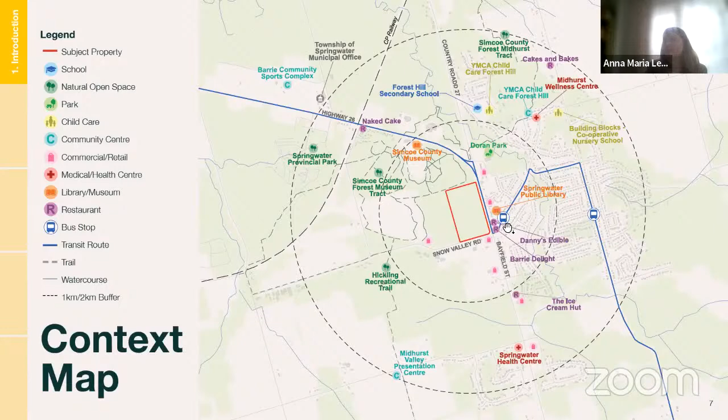I think the last part of the introduction is our timeline so far. The project timeline has been divided into 3 key phases. Phase 1, beginning last year and running till about the beginning of summer, was the engagement and research portion, heavily led by 880 Cities with their pop-up events and focus groups, gathering feedback from the community and key stakeholders mentioned earlier.

The second process was phase 2, the design process, from end of summer to late fall last year. That was taking all those ideas and synthesizing them. We carried out a charrette exercise and came out with a preliminary design strategy for the site, which was developing our draft master plan.

Since that point, we've moved on to phase 3, the refinements - working with the steering committee and town staff to take that initial master plan and refine it, work through it, see what works and what doesn't. Since then we've explored an additional 4 options, which Vivian will be discussing later on. So we are here hoping to get your feedback today on the 4 or 5 options, and the ultimate preferred option will be explored in a final summarized report to council.

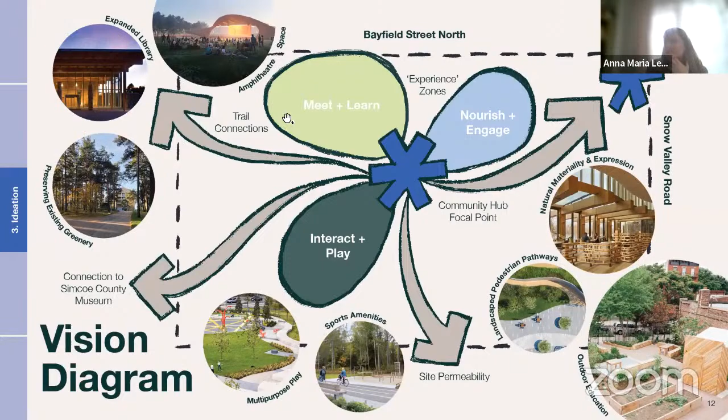As Anna mentioned, from now on we are going to delve into the design principles that led us to these 3 zones of experiences and 3 main buildings with different programming, following what we heard from community members and key stakeholders in this process.

In the 5 options we are going to see from now, there are design principles that led us to design decisions, building location, and site circulation. Listening to the community, talking about connection with nature, and connection between community members that would foster a sense of community and belonging.

There was also a very explicit need and desire to keep the ambience and environment as is, in terms of building from the pathways that already exist there and the trails that connect through and to the site. Based on that, we had the idea of one of the core principles being enhanced connectivity - there is a connection between the site and surroundings already there.

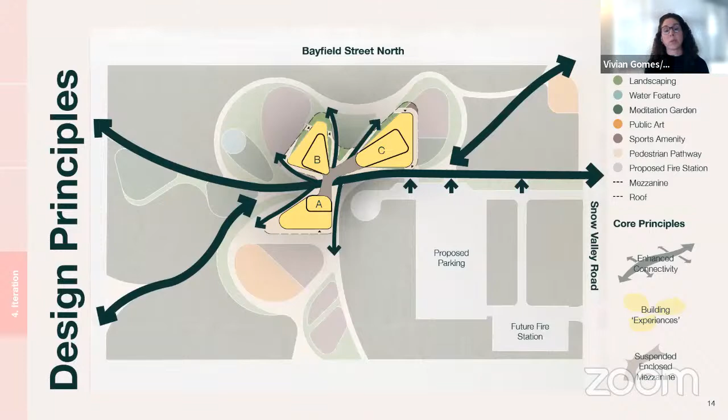But at the same time having uses and programming separated and integrated. So as you see, we have building experiences connected at grade, uninterruptedly, and then connected by a suspended enclosed mezzanine that would bring this sense of unity between the 3 buildings.

So building A, we have 5 options for building A. This is the interact and play experience. As you can see, there is an outdoor programming that's flexible and can be tailored according to the community needs in the next phases of the project.

But we envision bringing from community feedback an outdoor gym, tennis courts, pickleballs. We would also have a multi-use and intergenerational area. In all of these zones, we would have a mix between hard and soft landscaping surrounding the buildings and integrating these zones to the natural forested area that we already have there.

The transitional spaces between the indoors and outdoors, we would have those terraces that can be used as a cafe, as a bar patio, and also a covered area somewhere that people can look and experience the outdoors, but with the feeling of enclosure and protection from the weather.

Internally, we included the fitness area that would be 500 square meters dedicated to a fitness center for the use of the community. And then there is a space for a lounge area in the mezzanine. A lounge area can be seen as spaces to sit and gather or read a book. It's basically a community living room.

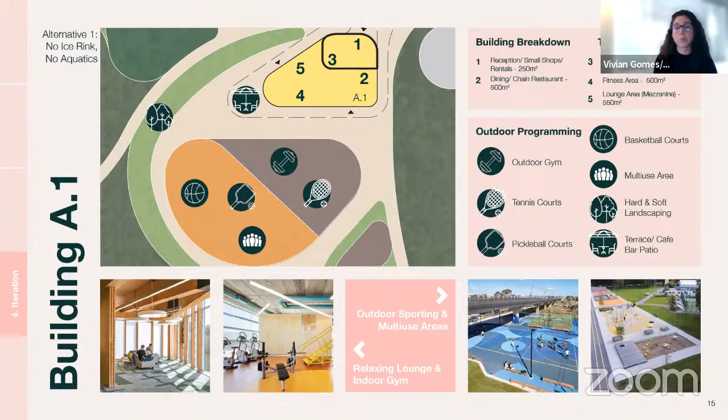Just to highlight this alternative of building A, this option does not consider either an ice rink or an aquatic center. On the bottom, you can see precedents and examples of what it can look like, but again, as this is a master plan and just the framework where the project will evolve, these can change.

So the second option, an alternative for building A, remember this is interact and play experience. This alternative considers including a single arena, a single pad arena, estimated at 1,760 square meters. We will also include washrooms, showers, and lockers facilities. And as in the first option, space for rentals, small shops, dining, and also the lounge area in the mezzanine that can be a space for parents to gather while the kids are playing hockey.

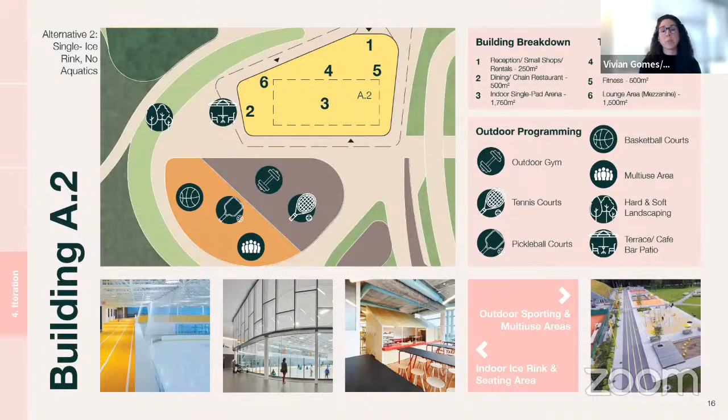And the idea is that this is an integrated space, so transparency and visibility from different areas of the building is encouraged.

So the third alternative for building A includes a double pad arena, that would take 3,300 square meters. And as we increase the programming and use of the building, facilities such as washrooms, dining, lounge area, and reception would increase as well to be aligned with the demand and new capacity of the building.

So we have here 10,750 square meters. This is the gross construction area, which will discount around 5% of space dedicated for circulation and some other structural elements of the buildings. Again, the idea is to have this transitional space between the building and the outdoors. As you see the roof line dashed, you will have some sort of terrace between the building and the outdoor amenity areas.

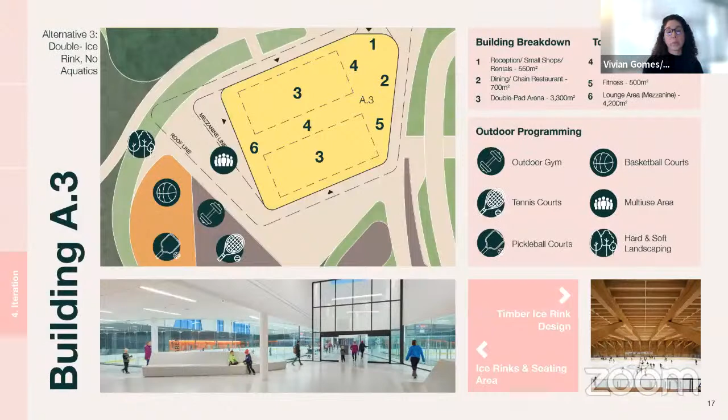So this is the fourth alternative that, different from the others, includes an aquatic center. This alternative is a single pad arena that would take around 2,000 square meters, and an aquatic center that integrates around 1,300 square meters.

So we have an increment of total GCA here, now 11,650 square meters. As I mentioned before, as the building area increases, some of the facilities are going to increase as well to respond to the new capacity of the building. As you may notice, the outdoor programming we try to keep the same between all these building A alternatives.

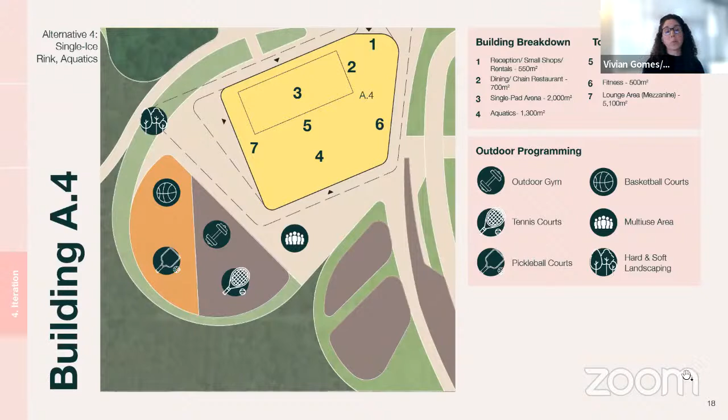The element that's changing, as you see, is the additional arena or arena-aquatics combination, as you just saw in the other three options. So the final option for building A would be a double pad arena and an aquatic center. We get to a total GCA of 12,700 square meters to accommodate the double pad arena, the aquatic center, and the increased facilities that have to follow the increase of building capacity.

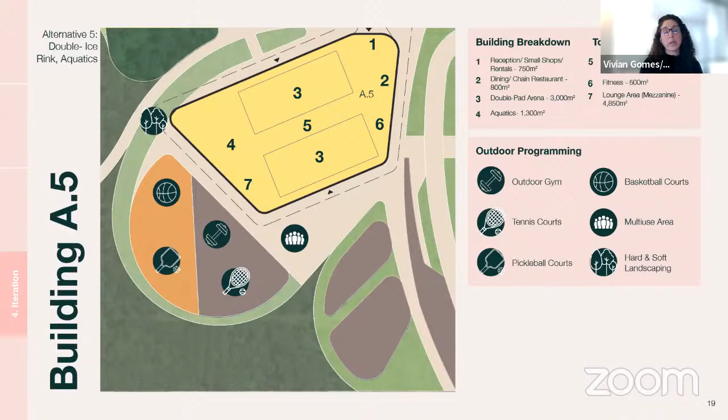And we'll move to building B now. Building B is that space, as we mentioned, like the meet and learn.

We also believe that having a play element there, the natural playground - we heard a lot of community members expressing the needs of more natural spaces to play - a water feature that can be a splash pad or a pond, even with a flexible use that can be adapted to winter time.

That's because we believe that play is also a tool to learn, and arts and culture, as is stated on the key themes, like culturally diverse and celebratory spaces. We envision this outdoor amphitheater that can be versatile and adapted to year-round activities, again having communication between spaces and nature in a very permeable and connected way.

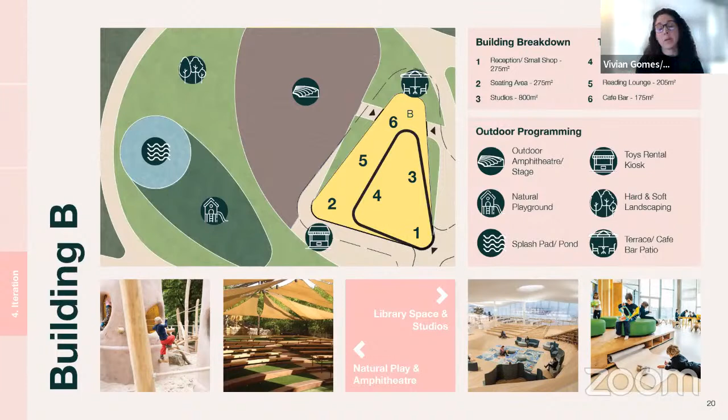So some of the precedents at the bottom, you can see the multifunctionality, adaptability, and also the creative use of spaces that should be shaped by the community.

And building C, as I mentioned, this is the Nourish and Engage. So we included the community garden and the eco hub, where education about the environment or about nurturing the earth and this connection with the natural environment would happen there.

There was also the need to have these community learning and multi-purpose spaces where studios or classes can be fostered there, as well as intergenerational activities between seniors and youth to have one or another teaching each other their skills.

Offices - we included 930 square meters for office and a daycare with washrooms that would serve these facilities as well. We would have some of the offices on the ground level and some of them on the mezzanine. This is all a note to these elements and the way that we are organizing, laying out the building interiors.

This is just to help you visualize the potential for building spatial organization, but it's not fixed. This is again a master plan level exercise, to help you envision how we can use these spaces, but not fixed yet.

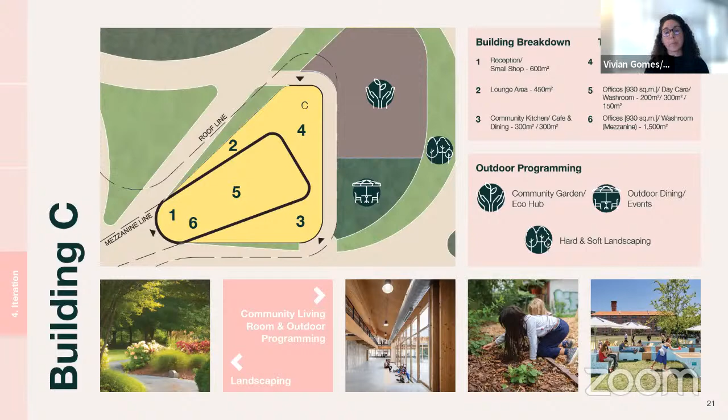So in the next part of the presentation, the next slide, Anna—you see a very rough image, but again, to help you visualize, at this point we don't have defined materials or a defined structure.

But we do have this vision of how the massing is going to be. The envelope of the building would be transparent to allow for connection between indoors and outdoors, indoors and nature, as many community members have expressed that need. The suspended mezzanine, while enclosed, allows for permeability—you can have a view of the site and of the integration between the three buildings from the upper floor.

At the same time, people would keep walking and navigating through those spaces without barriers. The idea here is to connect and remove barriers for movement. So this is very rough, but it gives you an idea of the three masses of buildings connected by one roof and one suspended, closed mezzanine, with the core functions stepped back from the envelope to allow for permeability between indoors and outdoors.

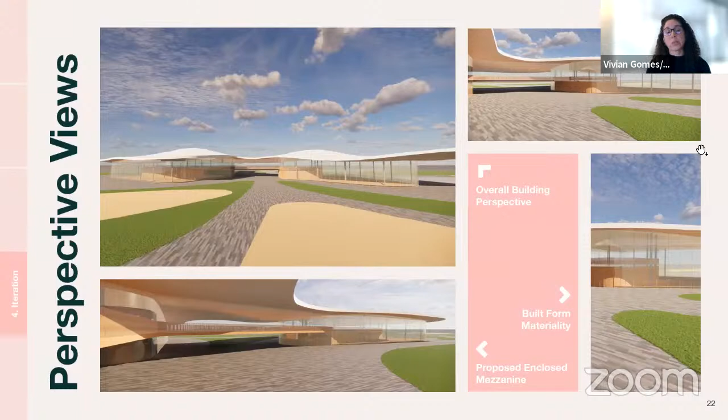So for the final part, closing this presentation, I will invite Shane Morgan for final considerations and a commentary about overall cost assessment. Thank you.

Obviously, material, structures, and sustainable features can all have a substantial impact on these numbers. But this is just our first port of call at really looking at the variety of building spaces, site servicing works, and general landscaping.

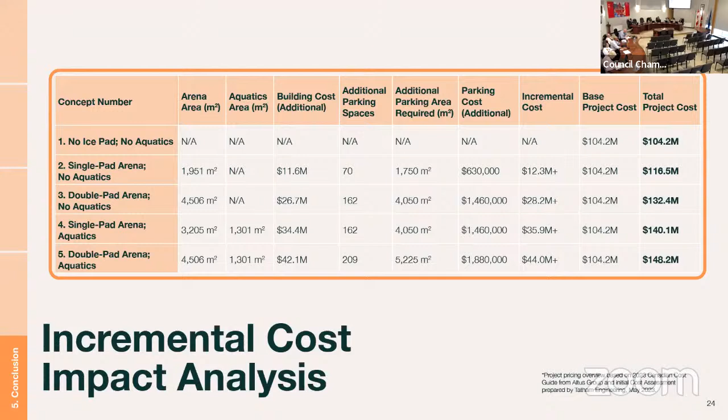Through Mayor Coughlin to Councillor Thompson, the detailed design has not incorporated any specifics for the amount of seating. We'd be looking to you for that level of guidance in any of the arena options, be it single pad or double pad. The details and amount of seating you would like to see, we can incorporate into the preferred option. As of now, it's an approximate area for what we think and have studied that a general arena size requires.

And Councillor Thompson, on your question of the minor hockey lines, I would assume that as we continue to grow, there would be an adjustment done to the lines. But if not, many of our residents, mostly in wards 4 and 5, are currently property of Barrie Minor Hockey. There's no option at a rep or other level to play in Elmvale at our existing arena, so while the front of their jerseys will say Barrie, they are Springwater residents. That's important for us to note. In years previous, when I sat on the Recreation Advisory Committee, there was a letter of intent or endorsement from the city of Barrie, as we know they would probably rent whatever we're not using, so that partnership could still be there.

And to Councillor Fisher, through you Mayor, to CAO Schmidt: regardless of the choice we go with, 1 through 5 or any combination, can you explain to us and the public how this would be funded?